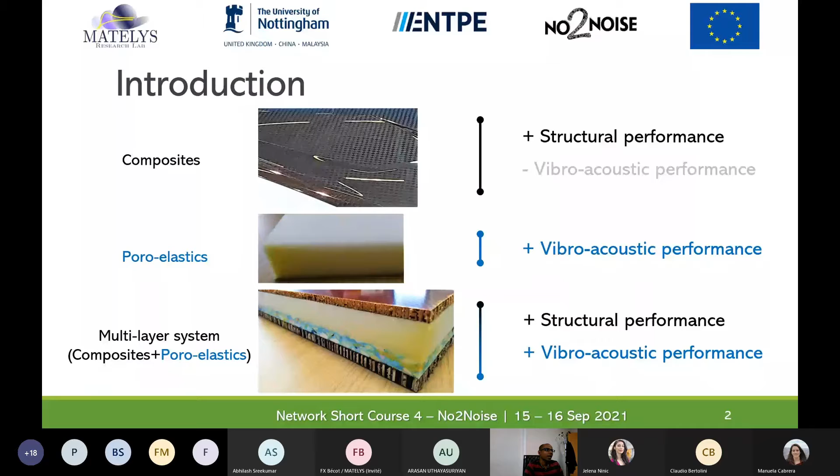To analyze these multi-layer structures, many types of vibroacoustic models are being used in the literature, and one such type is called equivalent or condensed plate models, which is the topic of my doctoral research. We will see what are these equivalent plate models and why do we use them basically, and what are the basic details that we should know to understand these models. What exactly do we get from them, and what is the process or methodology that we need to follow to get those properties. So that's the first part of my presentation, and after that I will move on to the 4 advancements that I made during the course of my PhD.

Since many equivalent plate models and other vibroacoustic models use plate theories, the first part of my research would be focused on the applicability or validity limits of the commonly employed plate theories for vibroacoustic applications in general. Secondly, I have developed a simple equivalent plate model for 3-layer structures. The main idea, the advantage of this simple model would be reducing the implementation time and other challenges compared to the existing equivalent plate models.

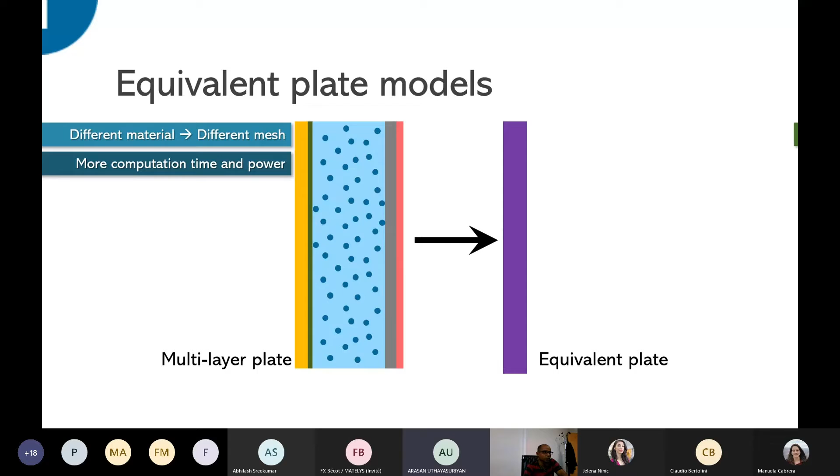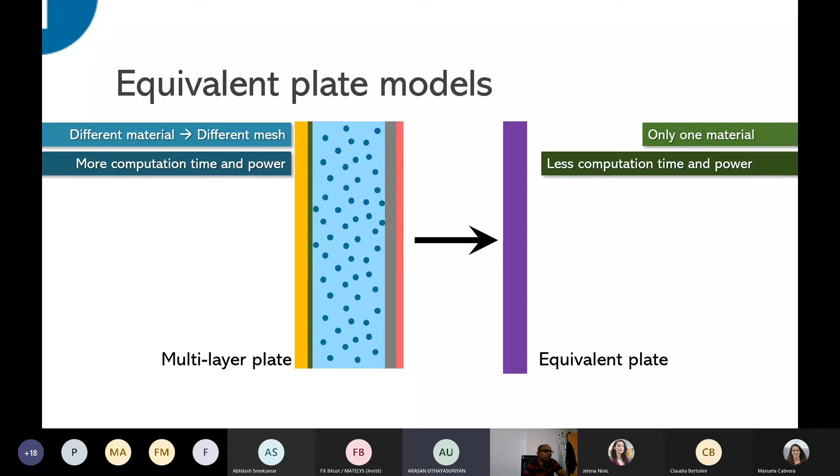Alternatively, if we could convert this multi-layer system into a single layer, which would exhibit the same or equivalent vibroacoustic response, we would end up with only one layer of material to handle, and this would help us in reducing the total computational time and power for the finite element simulation. This is one of the major benefits that we could realize from the equivalent plate model.

All right, so now let's look at another major advantage of these models. Depending on the type of layers that we use in the multi-layer structures, different kinds of waves could propagate inside the layer, which would then contribute to the global response of the structure. If the layers are too thin, we could observe that only bending and shear waves are contributing to the global response of the system. And generally, these two wave motions are categorized as anti-symmetric wave types. On the other hand, if the multi-layer structure is thicker, which is the case for some practical applications, or if it has any soft materials or porous materials, then along with the bending and shear, compressional motion also would influence the response of the multi-layer structure.

Now here, the equivalent plate models help us to understand the interaction between the anti-symmetric motions, such as bending and shear. For example, at a given frequency, how the multi-layer structure is going to behave. Is it going to be controlled by the bending of all layers, or only some layers, or does shear motion have an important role at what frequency, and how does this affect the damping nature of the structure? What are the interactions between the symmetric and anti-symmetric motions, and when are they going to be important? So this kind of information or understanding could be obtained from the equivalent plate models, and this information would be quite useful while designing the multi-layer system.

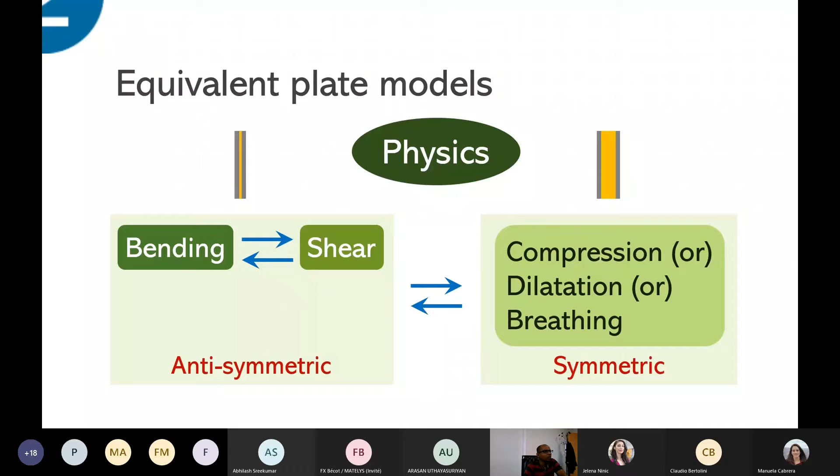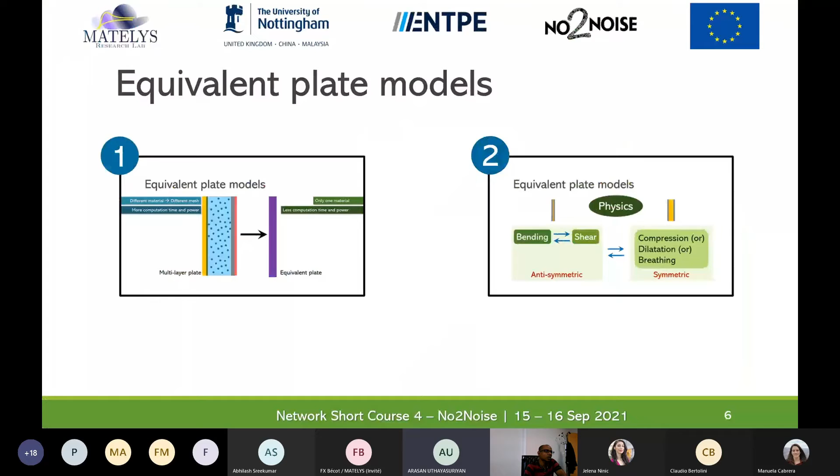So okay, so now to understand these models, we need to know a few fundamental information, and those are the vibrating or the propagating waves inside the structure due to the vibration, which we have just seen actually.

So, for example, if we consider a transmission problem across a wall, the wall would vibrate in this complex manner due to the sound source on the left side. If we break down this complex motion, we could find out that the bending, shear, and the compressional waves are fundamental waves that propagate inside these structures.

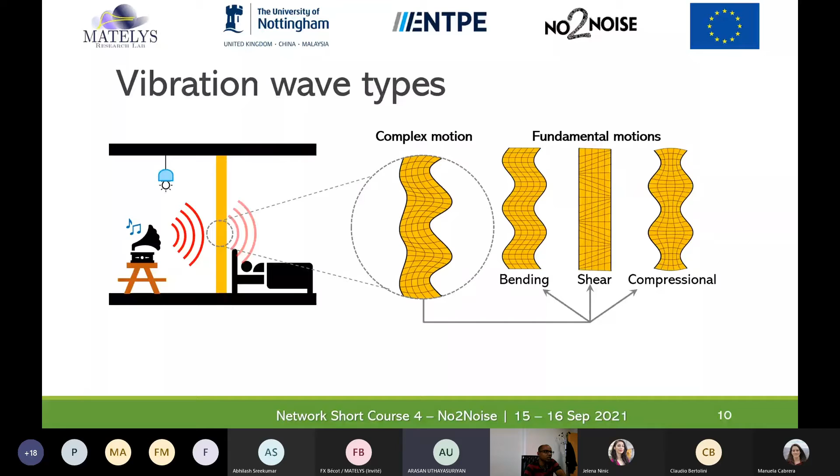There are different equivalent plate models in the literature, but they are mainly differing from each other by what are the propagating waves that they allow in each layer of the multi-layer system. Why are they allowing only few types of waves and not all? It is mainly to reduce the complexity level of the theoretical formulation, and thereby targeting only specific problems or applications.

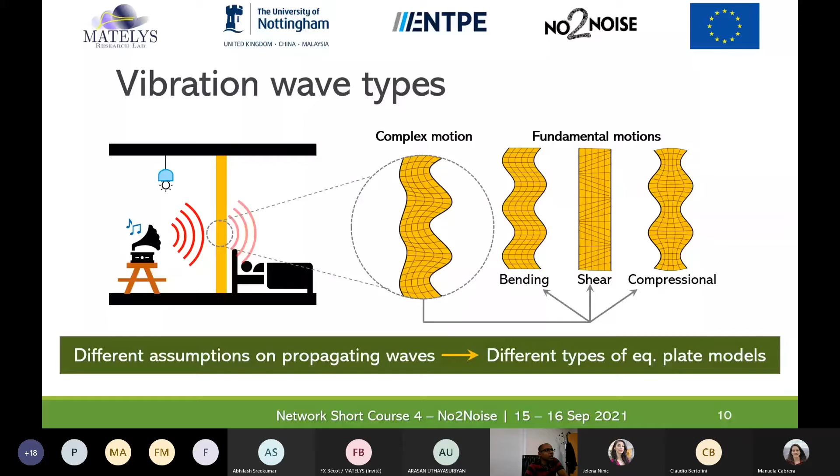So by formulating these equivalent plate models, what do we get as an output? Before that, we'll look at the three models that are widely used in industries. In the first model, called added stiffness model, only bending wave motion is considered in all the layers of the multi-layer system. And in another popular model called RKU, which was developed for three-layer systems, the outer layers are assumed to be controlled only by the bending, and the core layer is controlled by only shear.

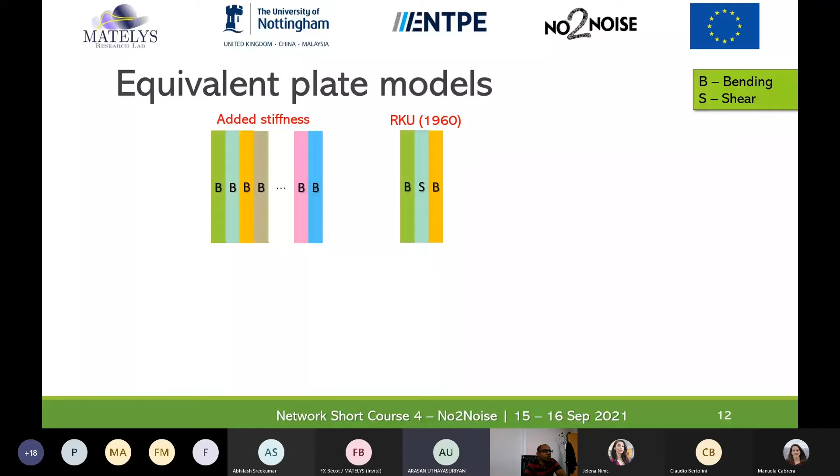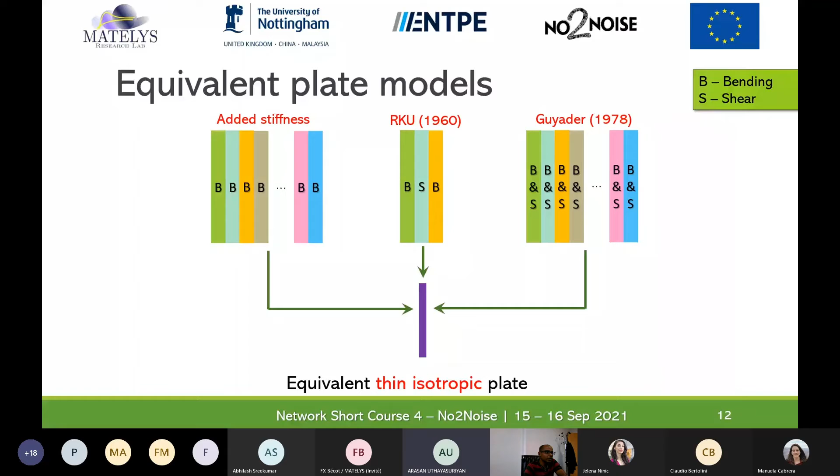In the third model developed by Guyader, both bending and shear waves are allowed in all the layers of the multi-layer structure. All these models convert the multi-layer structure into a single isotropic thin plate with a frequency-dependent bending stiffness or Young's modulus, and the frequency-dependent damping loss factor. And these material properties will be given as inputs for the finite element calculations, which I will show in the later part of this presentation.

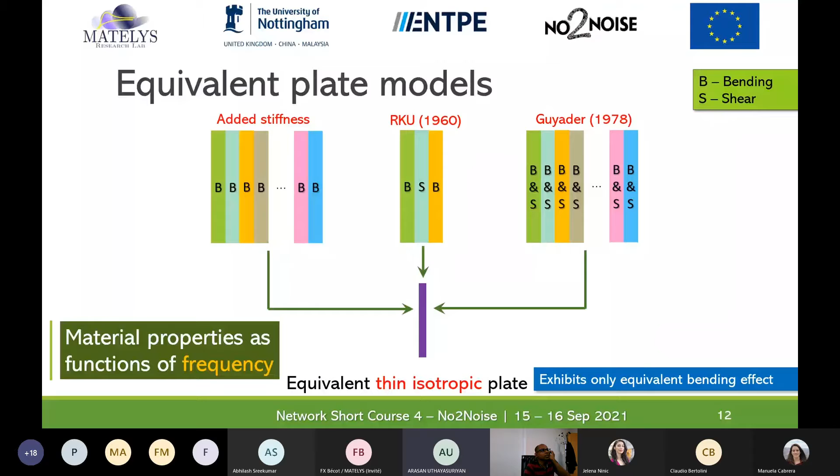So we should note that these models exhibit only equivalent bending effect of the multi-layer structures, and mainly neither of these models include a compressional motion in their formulation. So knowing these basics of equivalent or condensed plate models, now I move on to the advancements that are done to improve these models in my project. So the first one is to find the frequency limits of validity of commonly used plate theories for vibroacoustic applications.

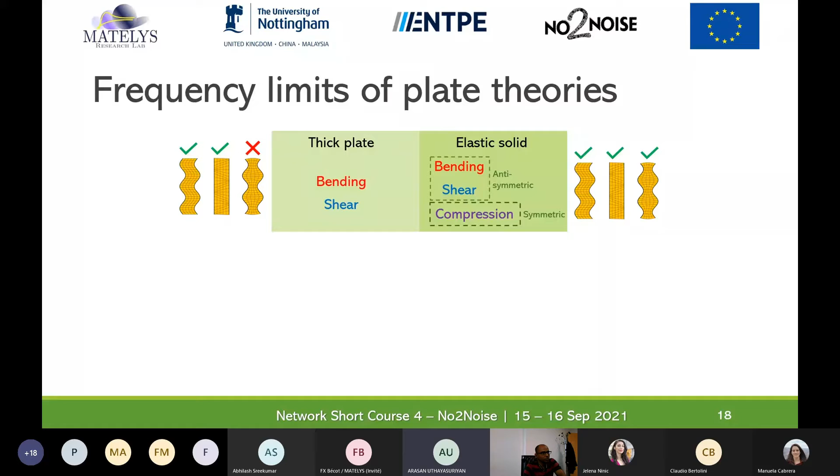For the frequency limit of thick plate theory, we could compare the propagation modes of the thick plate and the elastic solid. Note that the principles of elasticity include the compressional motion of the structure along with the bending and shear, whereas the thick plate theory neglects the compressional motion.

Now, using the approach followed by Dym and Lang in 1970, we could compute the antisymmetric and symmetric impedances of a plate. Details on how to compute these impedances are not the main focus of this particular presentation, but they can be found in the paper that we published, which I have shown below.

Similar to the process for the frequency limit of thin plate theory that we have seen before, we could also express a condition between the symmetric and antisymmetric admittances as shown here, which would help us to get the analytical expression for the frequency limit of thick plate theory.

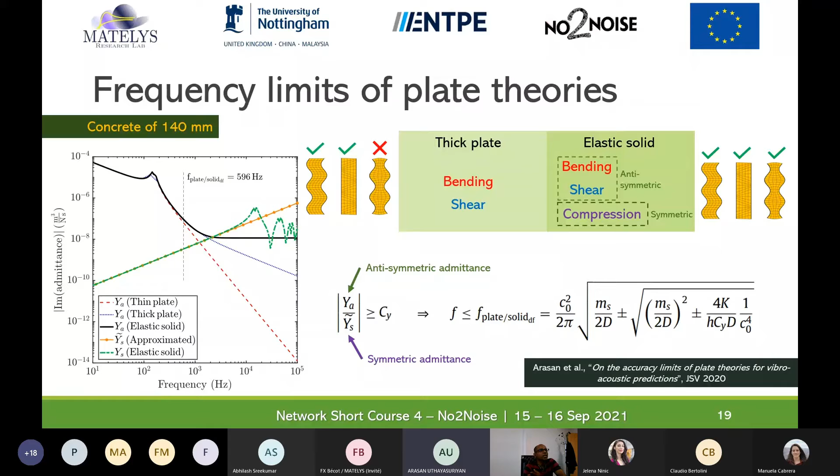Note that many plate theories do not include the compressional motion in their formulation. So this means that the frequency limit shown here is not only applicable for Reissner-Mindlin theory, but also for many other plate theories in general. So now if we plot a transmission loss for a concrete layer with the mentioned properties, we could observe the well-predictive nature of the frequency limits that are computed by the analytical expressions that I have shown before.

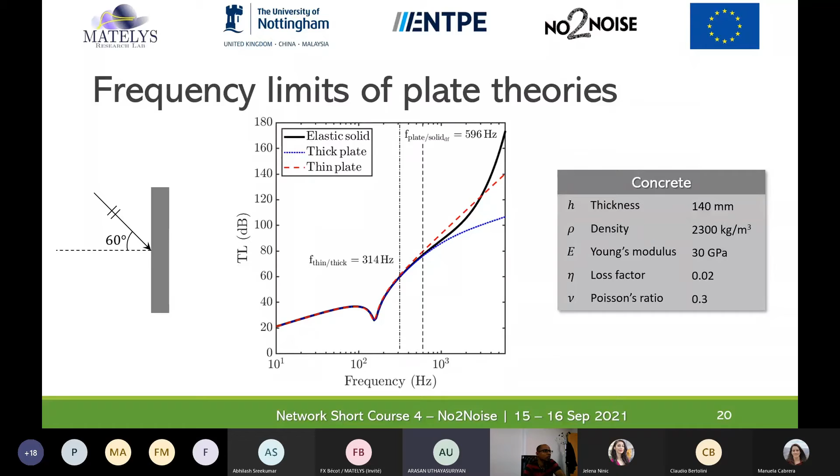Now, the second advancement is regarding the development of a simple equivalent plate model for 3-layer sandwich plates. Among the existing condensed plate models, Guyader and RKU models are widely popular due to their effectiveness to capture the natural response of the multilayer structures into a single layer.

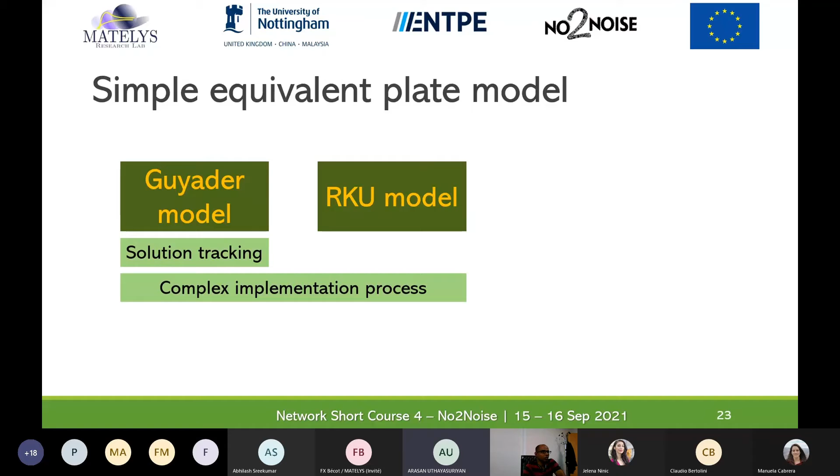But one of the major challenges with regard to these models is the implementation process, as these models require many complex computations. Implementing and testing these models would take a considerable amount of time. In addition, the Guyader model requires solution tracking techniques to be implemented to find the physically propagating wave of the multilayer structure. So to avoid these complications, a simple model is developed for 3-layer structures from the observations of the physical nature observed by the Boutin and Viverge using a homogenization approach.

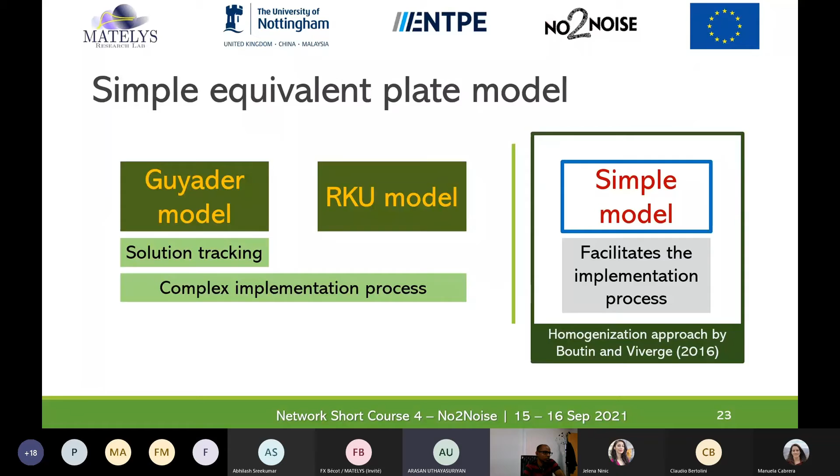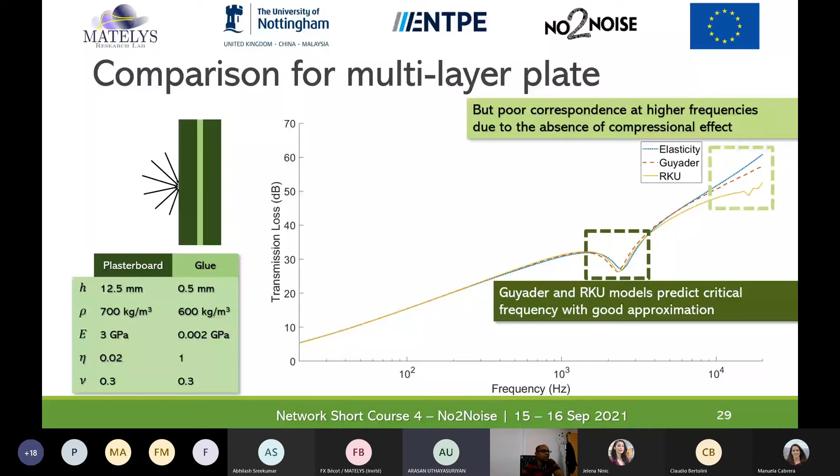This could particularly lead to erroneous results if the core is too soft, because the compressional mode also contributes to the complete vibrating motion of the structure after a certain frequency. And therefore, we have developed a new condensed model, which includes the compressional motion along with the bending and the shear motions of the multi-layer structure.

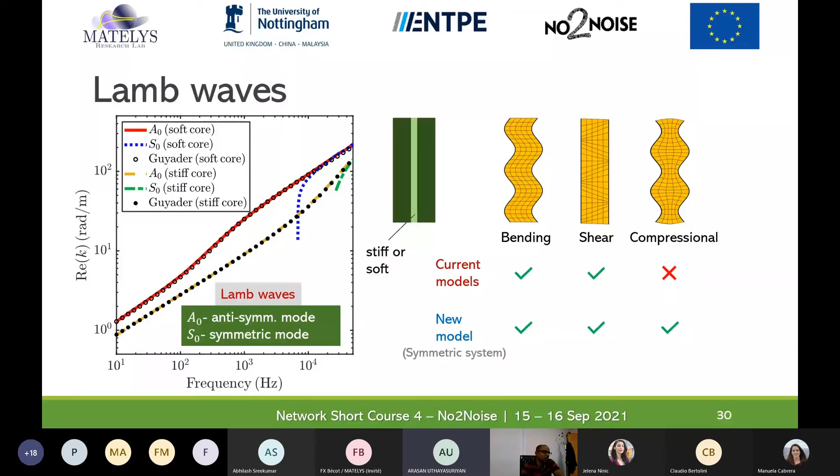Now, let's see the methodology of this new condensed model. Including the compressional motion along with the bending and shear motions would be normally tricky, but in the case of symmetric multi-layers, we could take inspiration from the work done by Dym and Lang, again from their work in 1970, where they demonstrated that we could decouple the symmetric and antisymmetric nature of the whole structure, and we could express the behavior of these two decoupled plates separately.

So for your understanding, I have just given the schematic representation of the symmetric and the antisymmetric modes here.

For 1 minute, sorry.

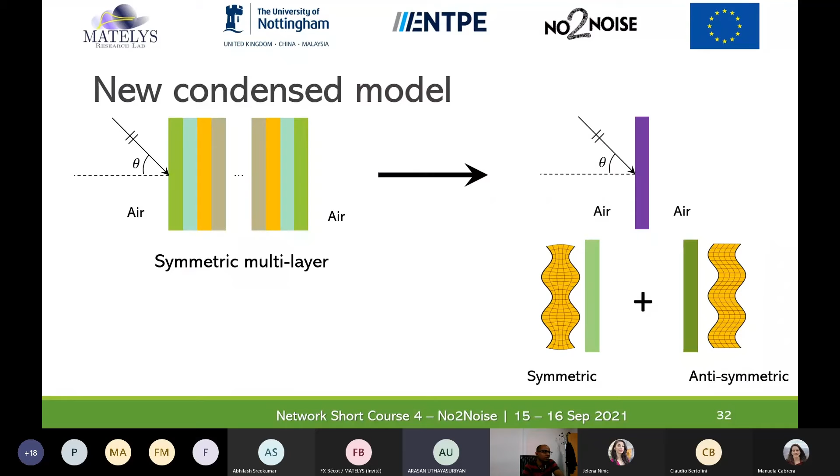Yeah, so from the approach followed by Dym and Lang, we could express the symmetric and antisymmetric modes of the structure, or we could compute the admittance or impedance of those two motions, which is what we are going to see in the next slide.

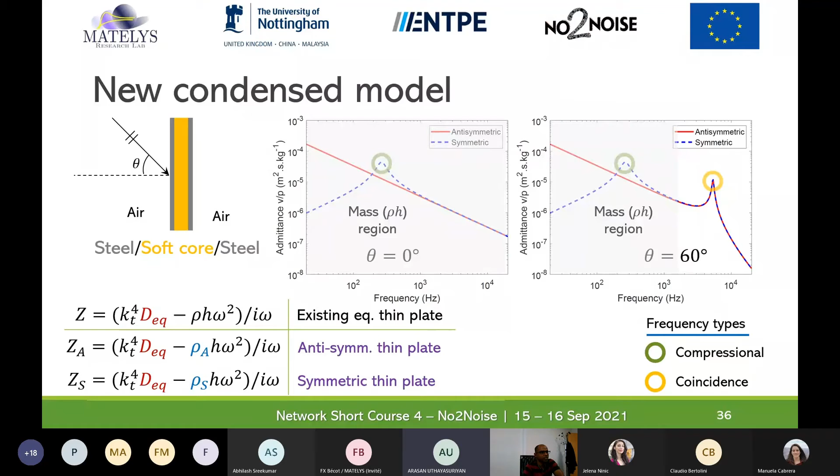So it may be also noted that at normal incidence, the entire region is actually controlled by the mass, as the contribution of the stiffness is 0 at normal incidence. So in generic symmetric multilayer structure configuration, we could express the impedances of these two decoupled equivalent plates as shown here, with the frequency dependent properties dEq, rho A and rho S. dEq is usually taken from any existing equivalent plate models, or a simple equivalent plate model that we have seen just a few minutes before, which was developed for a 3-layer structure.

The frequency dependent rho A and rho S are computed from the normal incidence calculations, and details of obtaining these two equivalent properties can be found in the article that we published recently. And I'm not going to focus more on how to get these properties in this presentation. So we also should keep in mind that the three dynamic properties do not depend on the angle of incidence, and therefore they can be called the intrinsic properties of the multilayer structure, which is quite powerful in computing the vibro-acoustic responses for many acoustic loads.

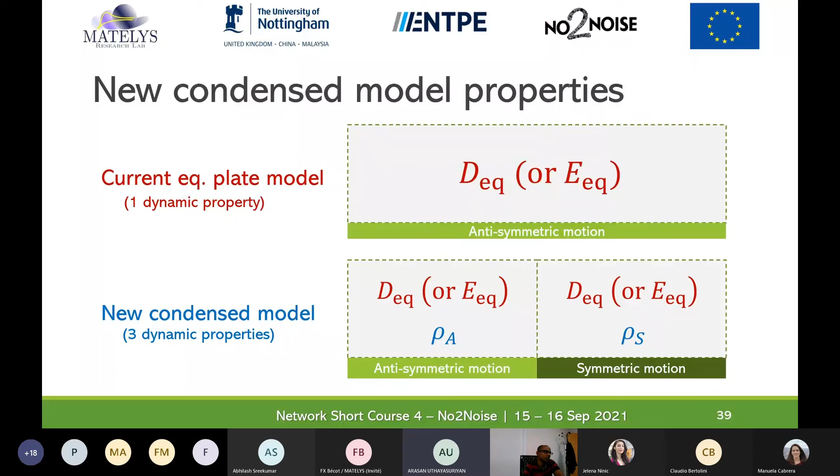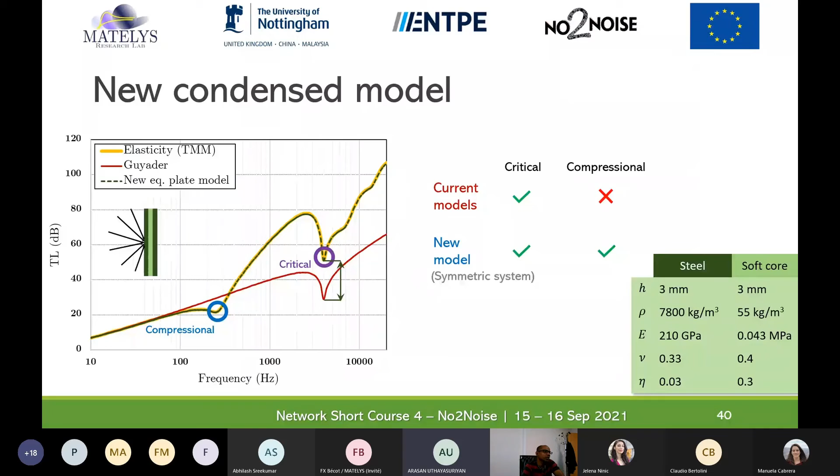Now, if we plot the response from the newly developed condensed model, we could see that it correctly captured the vibro-acoustic performance throughout the frequency range by including both symmetric and antisymmetric motions of the structure. Okay, so now it's time to implement this newly developed condensed model into the finite element framework to realize the benefits on the total computational time as we have seen in the initial part of the presentation. So we know that for a multi-layer system like this, we need to keep only the condensed layer with the dynamic properties D eq, rho A and rho S.

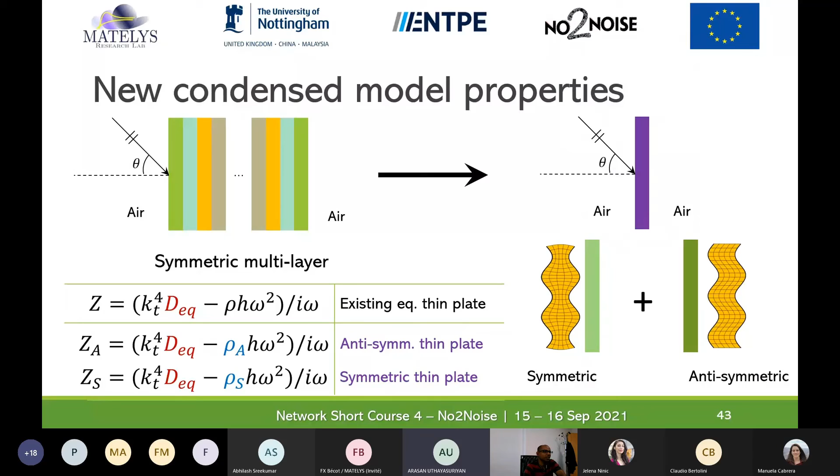So in our implementation, we modeled this condensed layer with thick plate elements instead of thin plate elements. Now you might ask, how can you model with thick plate elements while the condensed models are based on thin plate theory? Because if you remember, we used the thin plate impedances or the thin plate theory to get the dynamic properties of the condensed layer. So why did we go with thick plate elements instead of thin plate elements, you might wonder. The main challenge with thin plate elements is they require special shape functions which should offer non-zero higher order derivatives.

So this often leads to a complex implementation process, and additionally, if we want to run the simulations for higher order elements, we would need another set of special shape functions which are even more complex.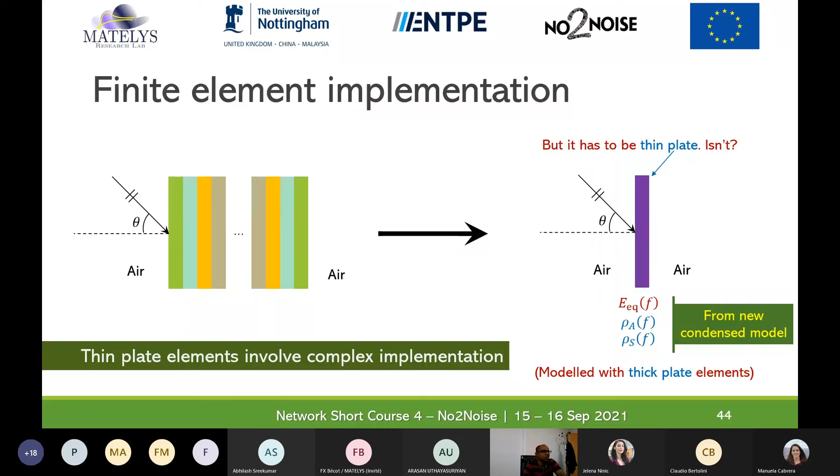So therefore, to avoid this, we modeled the condensed layer with thick plate elements, which have two different parts in the stiffness matrix definition. We have a bending part Kb and a shear part Ks, and these element stiffness matrices can be easily obtained by the standard isoparametric shape functions formulation.

So now if we introduce a penalty factor gamma on the shear part, we could observe an interesting point here. If I increase the value of the penalty factor, we could observe that the thick plate response is actually very much closer to the thin plate response, right?

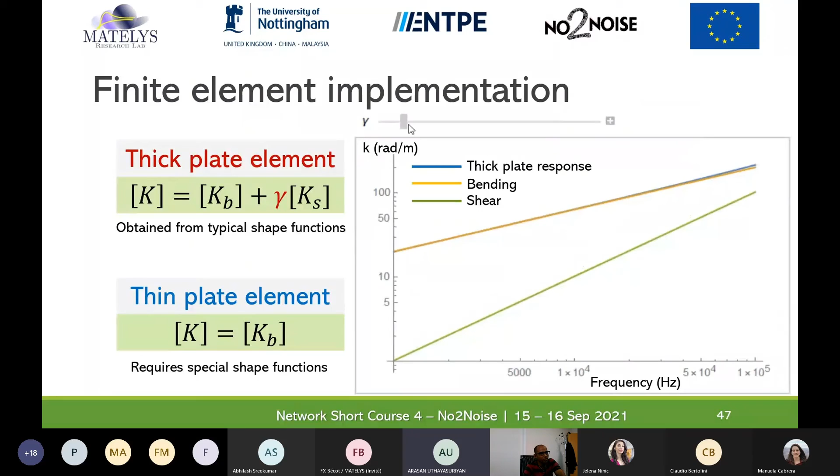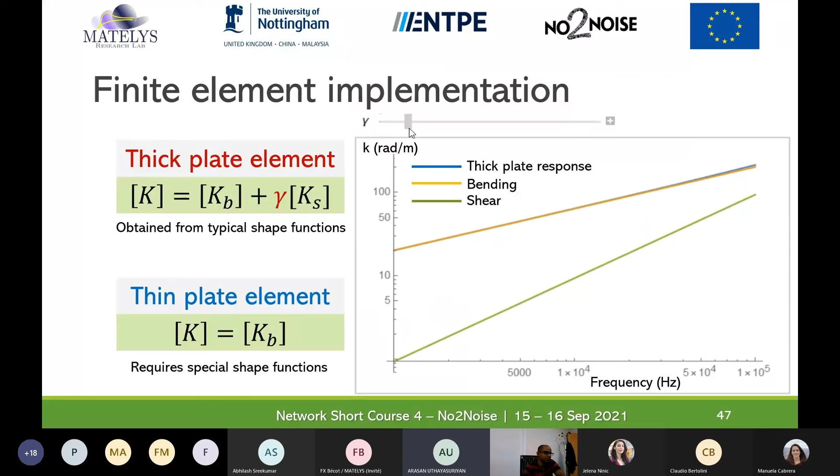So we could exploit this interesting behavior of the thick plate elements to retrieve the same or similar behaviors of the thin plate elements without going through all the hassles of implementing the special shape functions that we need for thin plates. So with this observation, we are now confident to use the thick plate elements with the penalty factor on the shear part to model the condensed layer.

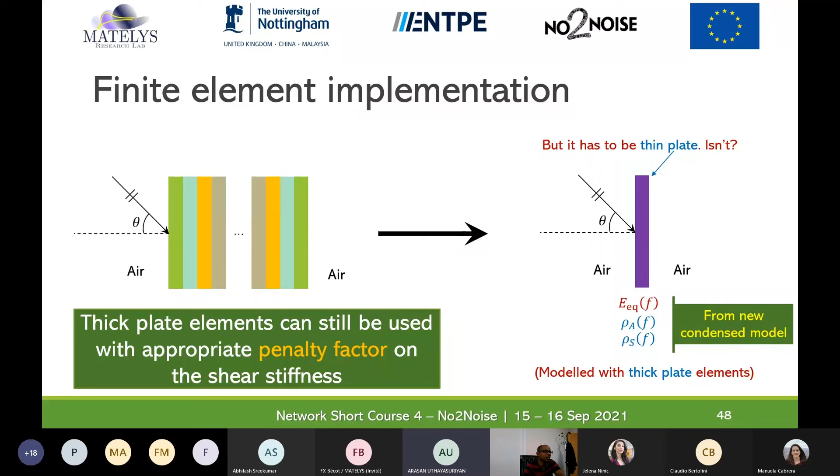Note that in the finite element setup, this condensed layer would look like this. We have two air layers that surround the condensed layer. As we have seen before, the condensed layer is decoupled into two condensed layers corresponding to antisymmetric and symmetric motions of the structure. You could see that the antisymmetric condensed plate elements are defined with the dynamic properties Deq and rho A, whereas the symmetric condensed plate elements are defined with dynamic properties Deq and rho S.

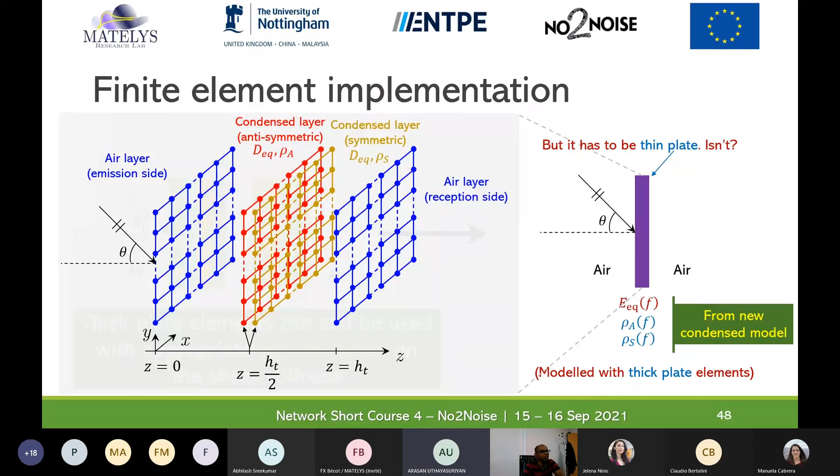Let's now look at the second configuration, where a double wall partition case is taken. In typical double wall constructions, the glass wool porous layer would be decoupled from the plasterboard skins with some air gap. Here I have given the air gap as 1.5 millimeter. So for this configuration as well, we could see that the proposed FE approach exhibits a good correspondence compared to the reference solutions.

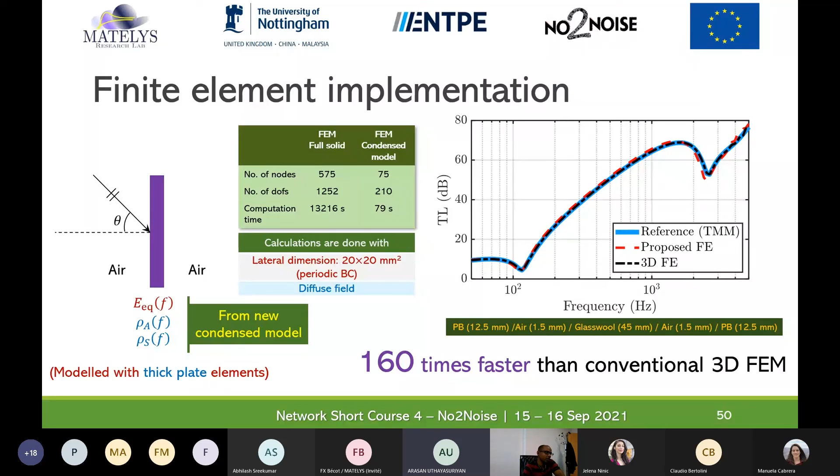On the computational time, we see that the condensed FE scheme takes 160 times less computation time than the conventional finite element approach, which is a significant benefit that we could get from the condensed models.

All right, so now we have reached the end of this presentation. So in summary, there are 4 advancements that I made during my time with the No2Noise project. At first, the frequency or validity limits of commonly used plate theories are obtained, and those are clear-cut analytical expressions which depend on the geometrical and mechanical properties of the single layer structures, while the other empirical relations in the literature mainly depend on the geometric parameters only. So these expressions would be quite useful to many vibro-acoustic models, including the equivalent plate models.

Secondly, a new equivalent plate model is developed for 3-layer structures using the observations made from the homogenization approach by Boutin and Viverge. The model is quite simpler than the other equivalent plate models, and therefore we could benefit from the quicker implementation time. Also, this model would be a handy tool to understand the physical behavior of sandwich structures.

Although the equivalent plate models are efficient to reduce the computational time and helpful to understand the physical behavior of the layered structures, they are mainly restricted to only thin structures. Therefore, a new condensed model is developed which extends its applicability to a wide range of thin and thick multilayer structures, and it can be applied to multilayers or sound packages with poroelastic layers as well.

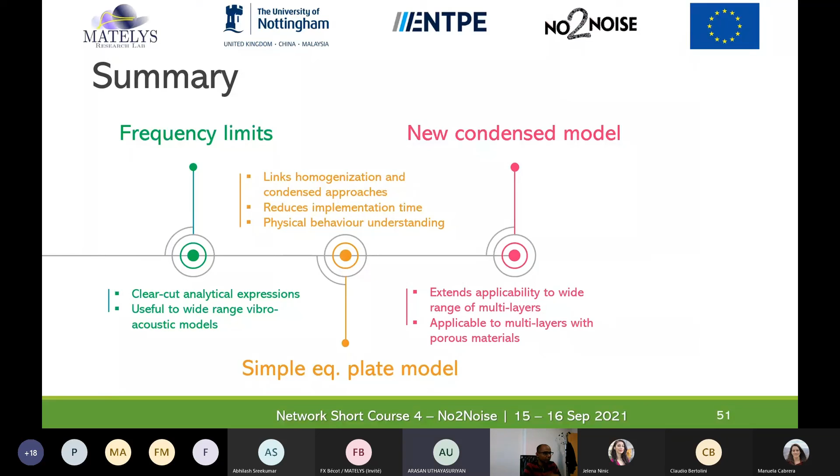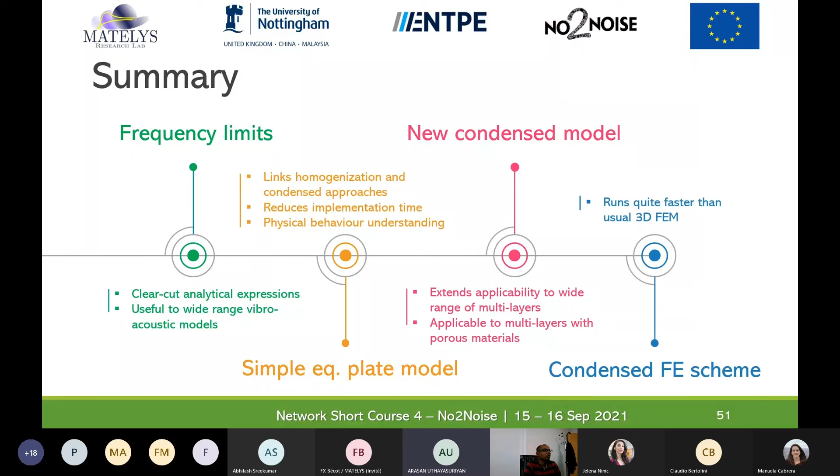And finally, the new condensed model is implemented into the finite element framework to realize the benefits that the condensed model provides to the users. Out of the 4 different presented works, 3 have already been published, and the one on the finite element implementation will soon be submitted to the journal.